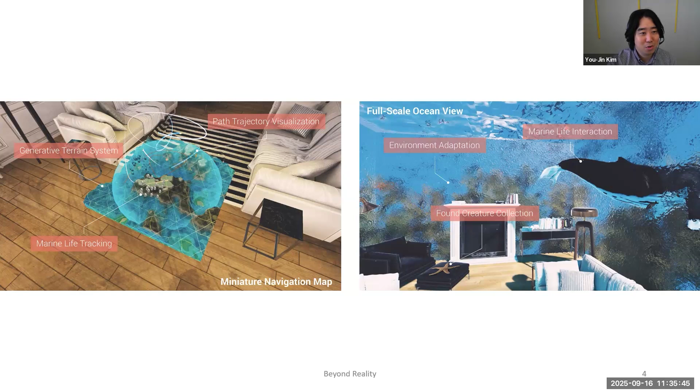After 6 months, it was adopted as a featured application by Magic Leap Studio, called Undersea. I'm sure some of you guys have played it.

Moving on, World Tracer is an application I made to run natively on a server, generating 3D floor layouts from the LiDAR sensor used by floor robot Omron. Multiple types of Omrons are deployed in the factory at any given time.

For the fundamental locomotion capability and avoiding running into each other, we made a live SLAM data map, which is updated constantly to make sure that all the Omrons know the changes happening on their factory floor.

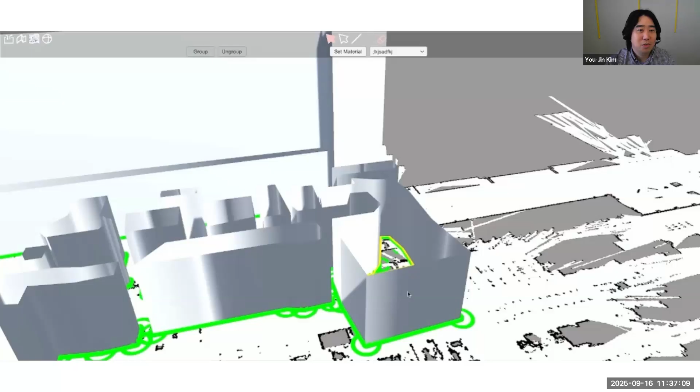As you can see, the maps get automatically updated to an OBJ file. The beauty is that with this map, we can see the different behavior parameters that will be assigned, depending on the capability of each Omron robot.

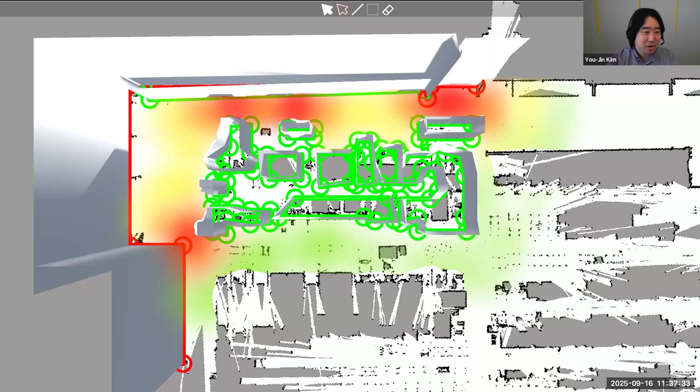These red spots are the spots where some kind of collision could most likely occur, so they slow down a little bit. This was very early work, but here are 2 minutes of video I want to share.

This was a collaboration with Bell Labs. Now I would like to move on to how we were able to utilize the rapid 3D modeling tool we developed to simulate and analyze operational productivity.

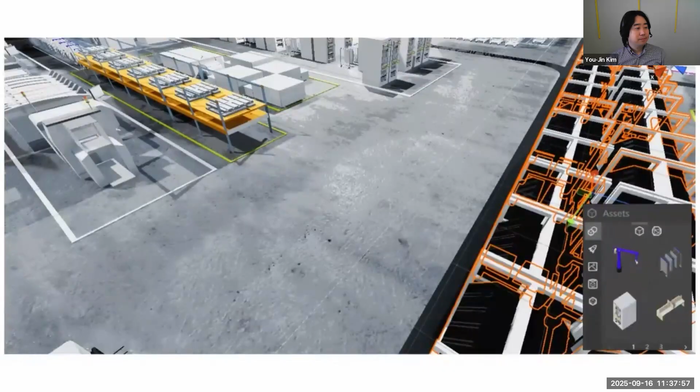In addition to the 3D modeling tool, we added a snap-to-grid factory layout builder for fine adjustment, which can help with our robot locomotion simulation training, as the Omron robot currently deployed in the factory floor has the ability to scan layers of altitude surrounding it.

Available objects that can be placed show up in a graphic suite, which can be found in various world builder games, such as SimCity.

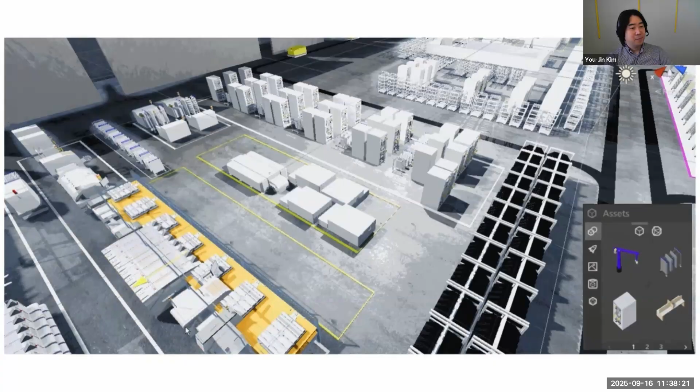Now that we know we can accurately generate a delicate layout, I would like to present how this model was used in our reinforcement training. This is an Omron robot model, which will operate as the agent for our simulation demo.

It emits 12 rays throughout 360 degrees in 2 altitude layers, making a total of 24 rays per robot. This reflects the capacity of Omron, as it utilizes a LiDAR sensor for its navigation.

Our simulation may not receive as high-definition feedback as the real robot, but for our pilot study, this is very much acceptable.

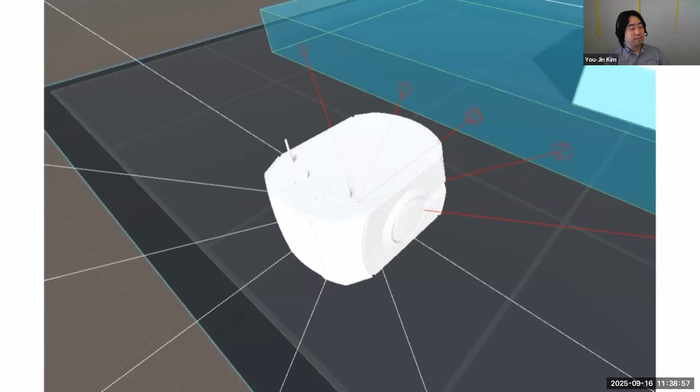This is training in session, currently learning how to respond around other robots while trying to get to the destination spot. Note that this is not the entire training - the agent only learns how to navigate around other robots in a timely manner, but that does not include safety precautions or location-specific response.

We utilized the parallel computing platform CUDA cores to train 200,000 sessions for each behavior model, training multiple sessions at once. An extracted neural network model was applied to our agent before introducing more complexity.

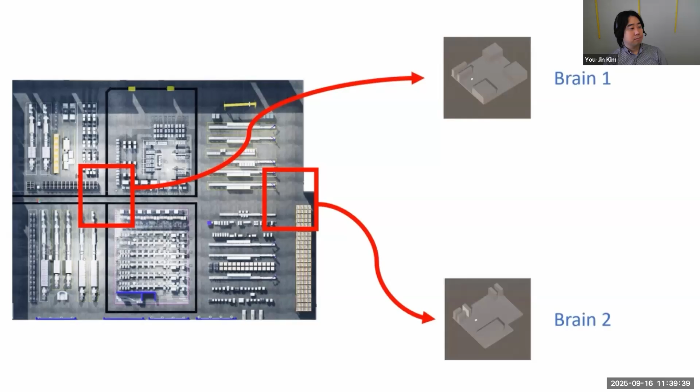This is where our rapid 3D modeling tool comes into play. The operator can sample out the area where intensive training is required, as these environments may present multiple access points, tighter hallways, and interaction with other types of robots.

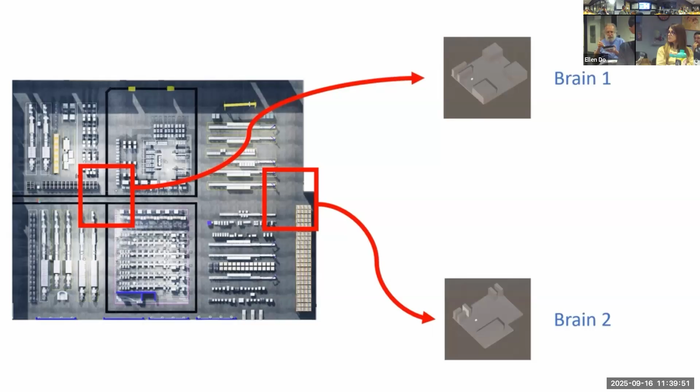The agent's decision behavior script was inherited from the ROS behavior parameter, where multiple neural network models can be combined and adjusted afterward. The ability to train a specific layout with such ease is powerful - if the operator notices an area where robots slow down to avoid collision, it can be trained in that particular layout to better understand and react optimally.

We hope these features we implemented in the factory simulation can present a better understanding of the factory. Now, I would like to.

So that was my project with Bell Labs, and with these two projects I actually learned a lot. It was in 2020, and the second time I did a research internship with them was at 22. I learned about wide area simulation, which is why I started doing a lot of wide area AR projects. Also from this time, I started to have a lot more interest in AI agent type behavior training models, which you will see in the later presentation.

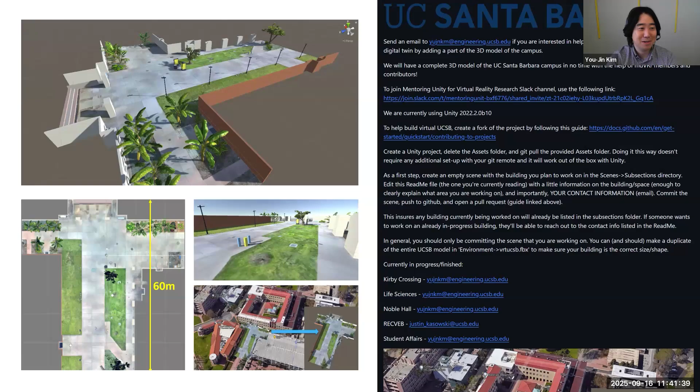The experiment we designed with my colleague was conducted outdoor on the UC Santa Barbara campus, in an area approximately the size of three basketball courts. Participants were allowed to walk anywhere in the space, but discouraged from walking on the grassy area. It's quite large actually, so just scanning this with LiDAR took several days.

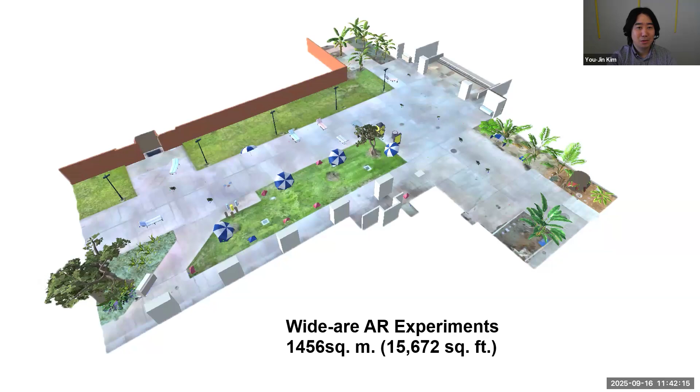Here we see all the physical objects that we brought into the environment, precisely aligned with the world anchoring and tracking of the headset. Look carefully here, as we bring in the virtual object we added to complete the scene.

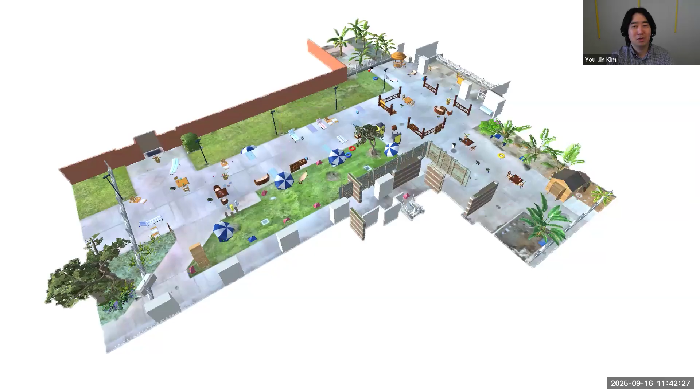In this environment, we conducted a 56 human subject user study to find user cognitive load while searching for gems and completing tasks, where the user must respond every time an assigned keyword is called.

Okay, let's see the video. Here you see me searching for gems in Kirby Crossing, which is the name of the area. Here you see software that shows the user experience using the digital twin. And the beauty is that these virtual gems can be occluded by the physical objects.

This is our playback software, and I'll show you a bit more of it later. The real nice thing about this playback software is that you can see what the user is gazing at. So we are doing eye tracking and full body tracking, so when you do playback in the digital twin, you can tell exactly what the user was thinking when they exhibited that behavior.

So moving on to how gems can be hidden. As AR glasses utilize waveguide displays on transparent glass to project objects to your eyes, this means the display has to shine brighter than the physical space you're looking at. That's the kind of limitation of AR glasses today.

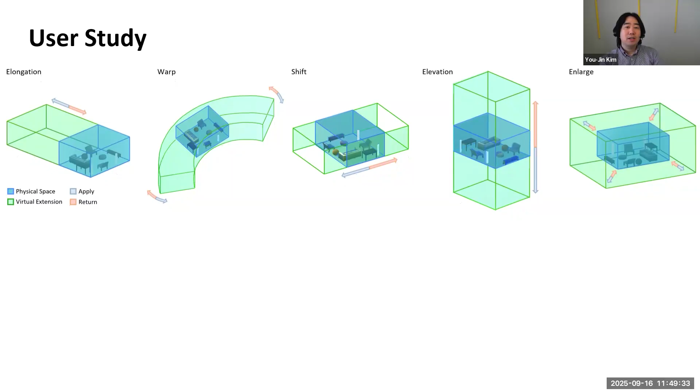We designed our distortion treatment to maximize these effects. Elongation, warp, and shift treatments were designed to induce directional effect, while elevation and enlarge treatments were designed to induce central effect. We obviously had significantly more—we tried 20 effects before we got to these 5. There was spinning, twisting, and all that, but too much movement gave people some sickness in the room, so we refrained from using those.

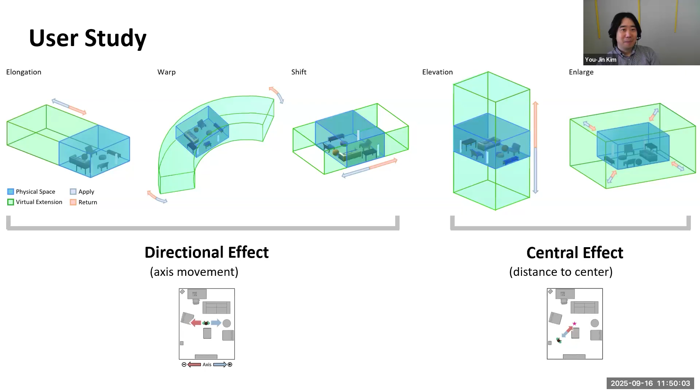The following clips show playback visualization of all 20 participants' locomotion in the room from the respective treatment. Each user trajectory was gathered separately, one user at a time in the room. The timing is synchronized with respect to the effect to display the user's overall movement response pattern.

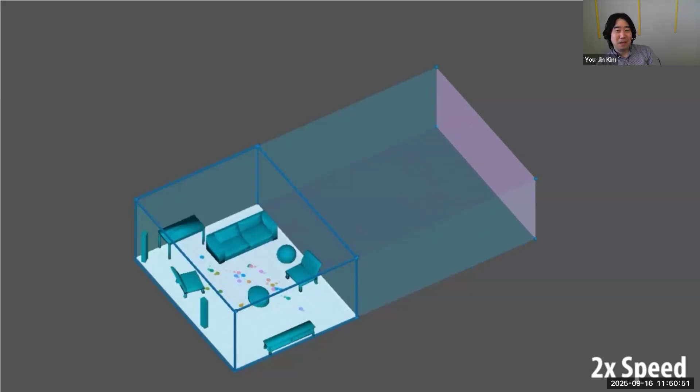If you look carefully, you can see that people are utilizing more space on the right when the wall is expanding. We believe the elongation movement pattern is caused by participants being curious and moving close to the extended area, but being pushed back when the elongated wall returns to line up with the actual wall.

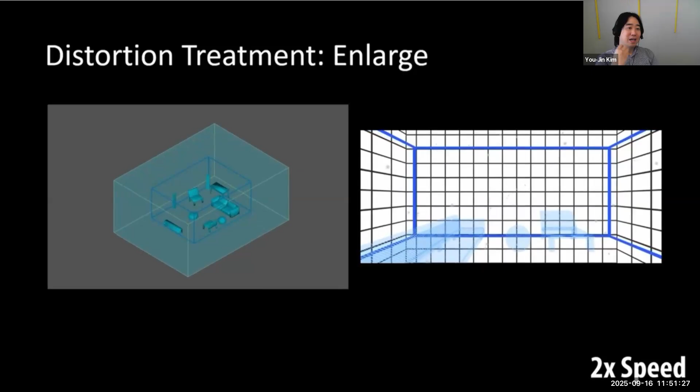Another example I want to show is similar. We gathered this point data separately, and it's synchronized to the effect. We believe this movement pattern is caused by the user exploring the perceivably enlarged space and then subsequently the contracted space. Even though the space isn't actually getting larger, in their field of view it looks larger, so they actually utilize significantly more space.

Results show that participants' natural locomotion can be influenced by augmented distortion treatment to significantly induce directional movement, in this case right or left. The shift treatment showed the largest directional effect in our user study.

On average, if you can get like 90 centimeters or 75 centimeters in warp distortion, it's quite usable, because that's the space you need before you collide with something, or maybe there's a virtual avatar that was supposed to be showing there. So we can push them away.

We can also validate that user position relative to the center of the room can be manipulated with AR distortion, as shown in this figure. The enlarged treatment showed the larger central dispersion and gathering effect in our user study.

Overall, the Reality Distortion Room was successful in inducing user natural movement in predictable ways. We believe our distortion effect could be used to induce distance between physical object and the user when needed. And obviously, because it's not voice or text specific, it can be applied to pretty much all regions, because it's just understanding about spatial awareness and how you utilize the space.

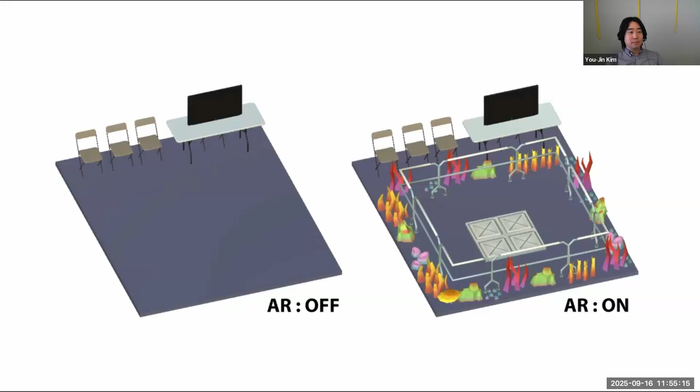Within the defined area, color-coded bubbles, each emitting a distinct cello note, float at the user's head level. User can freely move around the playspace, engaging with these bubbles to compose music by entering them. As each bubble emits specific cello notes, users are encouraged to navigate to areas where multiple bubbles are present, as users can create harmonies of mixed cello notes. Spatial Orchestra offers a musical experience where walking becomes the primary means of playing the instrument, allowing users to instantly create music within the given space.

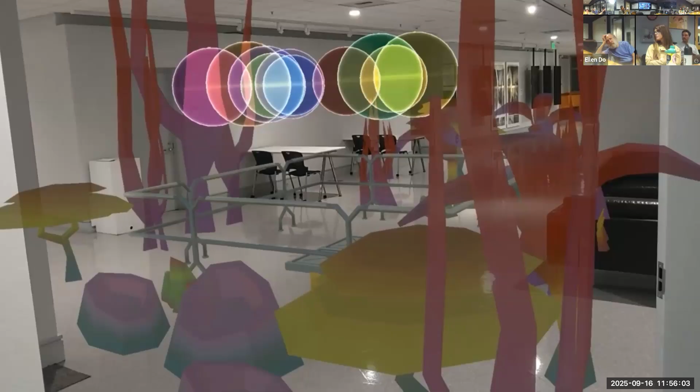This interactive element enables users to explore the intersection of spatial awareness, musical rhythm, that extends to bodily expression through playful movements and dance-like gestures within the bubble-filled environment. We collaborated with musicians to fine-tune the area's size, the bubble's dimensions, and the quantity of bubbles to provide the best possible music-making experience through bubble interaction. The intention was to establish a setting that was conducive to artistic music composition without being so disruptive as to make the user feel cluttered.

We shared our work, Spatial Orchestra, a spatial musical instrument that harnesses natural locomotion for a unique musical experience. This instrument not only immerses users in the music, but also turns their physical movements into expressions of creativity. We invite you to try it out for yourself and immerse in the joy of playing music while interacting with bubbles. Thank you for watching, and we hope you can try it for yourself at CHI 2024.

Cool instruments. Have fun. Oh, he's muted. You're mute. You muted. Oh, sorry, sorry. Yeah.

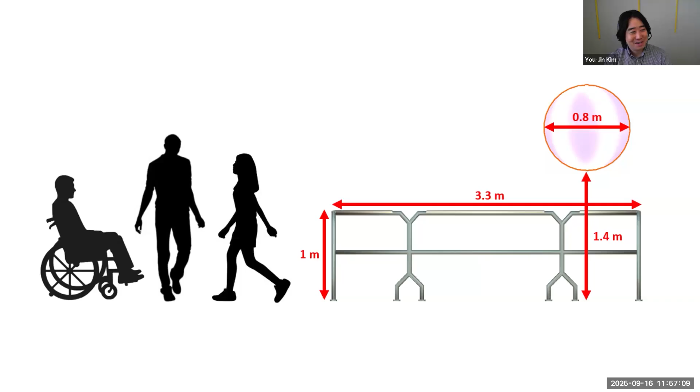So one thing that we learned when making this application is that, as someone who used to make games for quite a time, we had to think about how people actually engage in these AR spaces, which means that they like to put their heads in, but once your head is inside of the bubble, it actually doesn't render. So we had to make sure all sides were rendering.

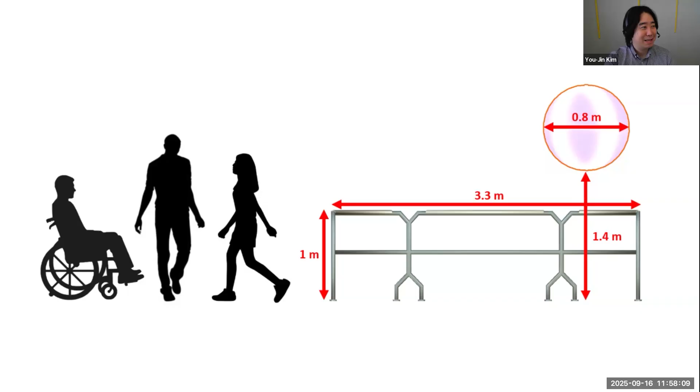Making accessibility much more complicated because it depends on the height. The bubble naturally does change, but how they like to interact, meaning jump, dodge, things like that, needs to be considered. So placement of the bubble was actually quite a research topic, but you can check that out in our paper. And this is talking about the double-sided shader that we had to make sure all objects you see there had - double-sided shader. So we had to reduce the alpha channel by 50%, and then it has both sides, so it looks normal, and yeah, things like that.

Okay, so these are my main works. Here I share my projects, Dynamic Theater and Audience Amplified, which represent my vision of the future of spatial content and virtual production.

Dynamic Theater investigates the application of augmented reality in immersive theater as a venue for digital dance performances. The freedom to position digital objects anywhere presents numerous opportunities and challenges.

It has become evident that curating the user experience while taking into account the physical layout and anticipating users' movement is critical in making an AR open world experience.

In order to properly utilize the full potential of the physical space and highlight the dancer's movement, we worked closely with dancers and a choreographer in creation of our AR play.

In our study, we used the standalone AR headset HoloLens 2 to give the spectator the opportunity to freely wander around the environment as the play develops.

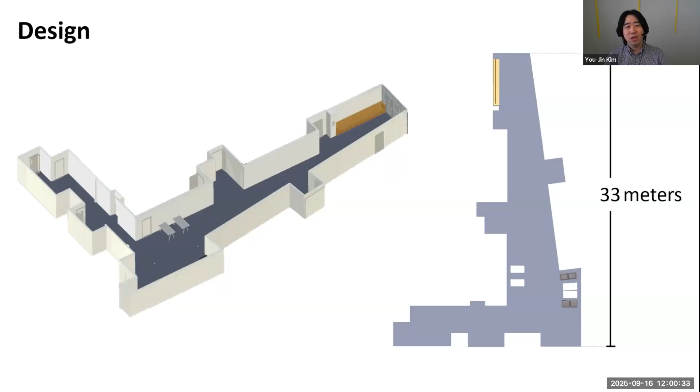We developed three distinct virtual stages, Future, Forest, and Fantasy, that overlay the physical space, each housing three dance performances. Our aim is to create a new environment, providing a refreshing experience for the user in the same space.

As I repeat, the strength is the space, but we are also limited by the space.

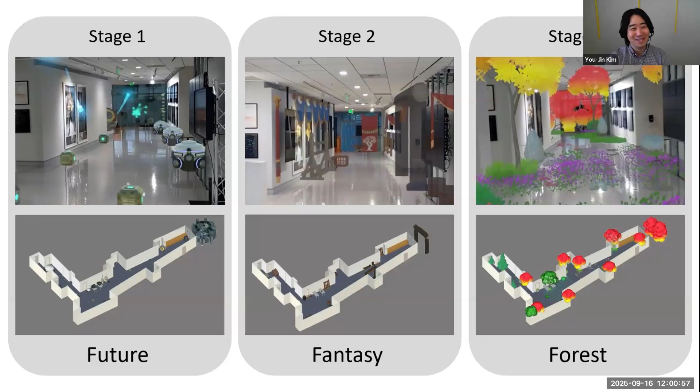In order to develop Dynamic Theater, we collaborated with professional dancers to capture dance performances specifically tailored to complement floor work dance moves in the virtual environment.

Here is the 3-meter wide, 15-meter long green screen setup we built. We used 2 DSLRs and 5 depth cameras to capture volumetric dancer playback data.

We deployed 3 navigation aids to help users navigate in open space. Floating particles show where to walk by slowly floating to the designated area, serving as a directional indicator.

Meanwhile, a floating arrow simply points to the next area, only showing up when you look down—that's more direct. And a spatial spiral shows up in the middle of the stage following the three dance performances.

Could you stop for a second? We have a display malfunction and I have no idea what happened. There was a 5-minute ticker at the bottom. I stopped the ticker, but I don't know—maybe your mouse moved, but it's connected, so how can it? Yeah, now it just flashed. I hit the on button. Okay, try again, it's coming back. Maybe it'll come back.

Meanwhile... Oh okay, it's back. As soon as you come in—thank you guys. I stopped the warning, but I didn't understand the warning. Okay, good, alright, You-Jin, sorry, we're back.

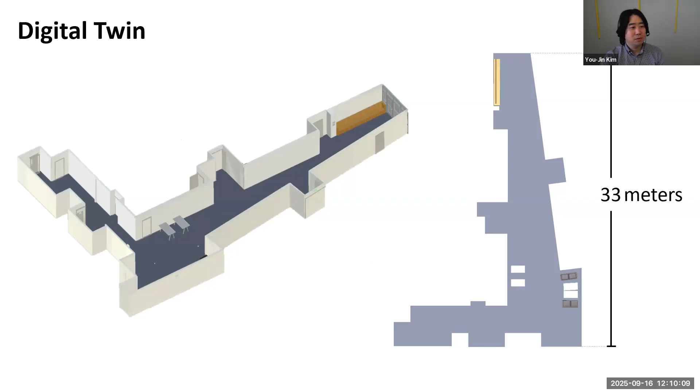Let me play this real quick. Here we zoom into one of the training environments, highlighting how AI can learn from both physical layout and tracking of user activity using an imitation learning type of reinforcement learning pipeline. The reward system was refined to encourage behavior aligned with watching performance and walking.

Details of the parameters are presented in the paper. It's a lot, but... excuse me.

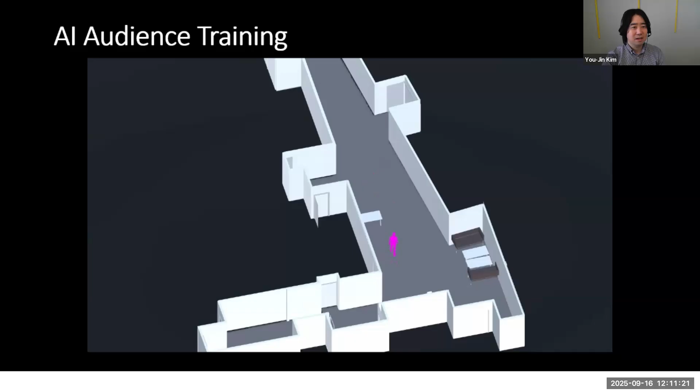I didn't include it in this presentation, but basically we collected from our previous study at Dynamic Theater about 373 hours of users using our application. What you see right now is actually just a simple playback of tracking data. From this, we created a DNN NPC audience that behaves very much like what it needs to in the space being performed.

While there are several differences between NPC and DNN virtual audiences, one notable observation was that NPC appeared much more intentional in their action. Conversely, the DNN audience exhibited more wandering behavior, making them appear more independent and distinctly more spread out during the performance viewing session. While it's difficult to quantify this result, as a close observer...

What sets the DNN model apart from NPC audience is that they position themselves in a way that mirrors human crowds. They move sensibly in the space and incorporate human-like imperfections, such as small, non-essential motions that we kind of find from humans. In our pilot study, we evaluated the effectiveness of these audience types.

The three virtual audience types were sound and audience only, NPC audience, and DNN audience. Results show that presence of virtual audience was preferred, and DNN turned out to be the people's favorite because the experience resembled a live event.